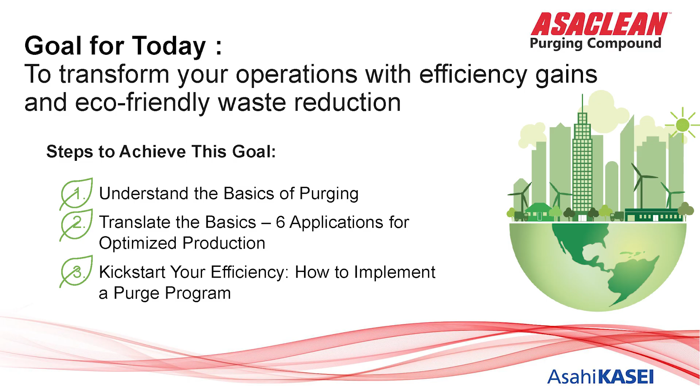We've been the worldwide leader in commercial purge compounds for several years, and we service customers in more than 70 countries. So what are our goals today? We're going to basically give you the basic understanding of purging, translate the basics into 6 applications for optimized production, and how to implement a purge program.

First, we'll start with the basics of purging. What are purge compounds? Purge compounds are designed to clean thermoplastic processing equipment. It could be injection molding, it could be extrusion and all facets of extrusion—pipe, profile, sheet, blown film, blow molding, every single type of plastic processing we help. Purge compounds contain a base resin and other additives to optimize and clean your screw barrel extruder downstream plumbing thoroughly and quickly, and they're used by processors across the industries to reduce downtime and scrap.

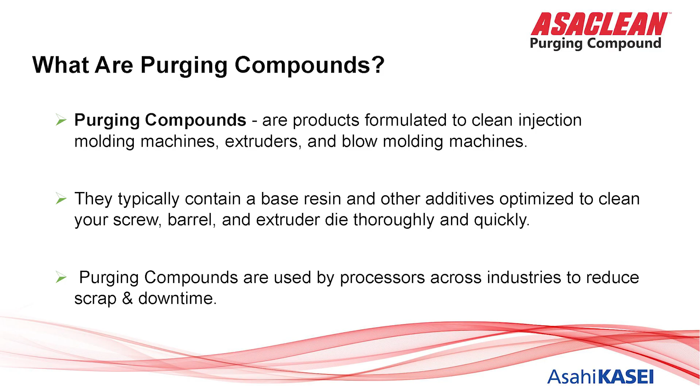Some of the variables that we need to determine for grade selection—because we do have 23 different grades of material—we're going to need to understand what your process is. If you're an injection, extrusion, or blow molder, the kinds of resins that you're processing, whether it's a commodity, engineering grade material, or a super engineering grade material such as PEEK, Ultem, LCPs, Ryton, and so forth. We're going to need to understand what we're actually trying to accomplish here.

Are we cleaning the die, the downstream equipment? Are we doing a screw pull? Everybody's situation is uniquely different. Even though they could be classified in the same arena, everybody's equipment is different, everybody's resins are different, everybody's processing is a little bit different. So we need to get a thorough understanding of where the problem lies, and then what we're going to determine is the type of purge compound necessary to get the job done.

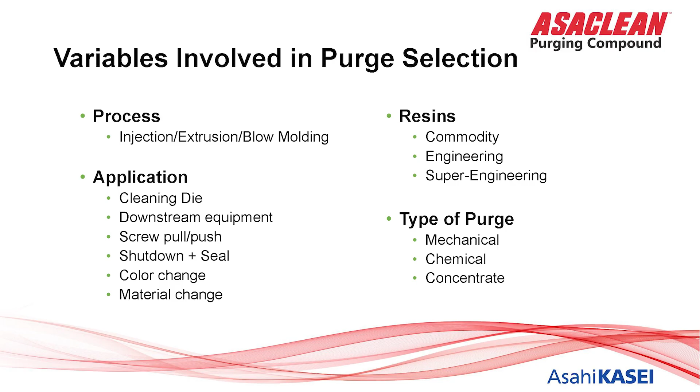Obviously, there are mechanical type purge compounds that you're familiar with, chemical type, and concentrate versions, which we'll get into a little bit later. We'll first talk about mechanical purge compounds. Mechanical purge compounds have been around a very, very long time. Those were primarily the first types of purge compounds that people used when purge compounds came into play. The neat thing about mechanical purge compounds is, again, they're simple to use.

Typically 2 to 3 system capacities of a mechanical purge compound are required to clean your equipment. For example, in an injection molder, if the screw and barrel holds 1 pound—and that might be high for some machines, but we're just going to use that as a round number—it's going to typically take 2 to 3 pounds of a mechanical purge compound to get the job done. They require no soak time. The object is to move the mechanical purge compound through the screw and barrel of the machine with the screw forward, as fast as you can. So as far as purge time, they're very, very short in duration.

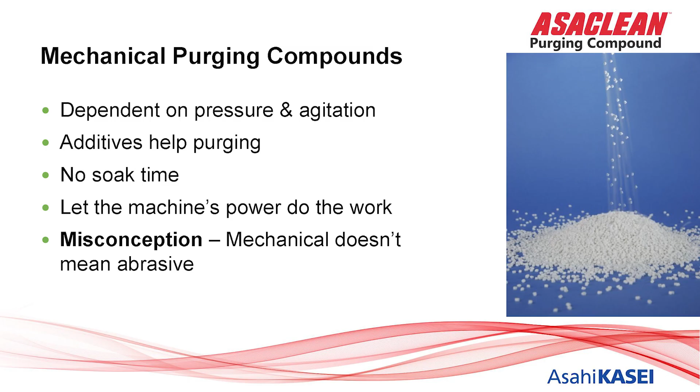Chemical purge compounds, little different animal. The reason why I really like chemical purge compounds, especially in extrusion applications, is because there's a lot going on chemically. Chemical purge compounds do expand. In addition to that, we create steam with the use of a hydrate, and the material will foam. The formulation also contains some mild detergents and mild abrasives, which help you get the job done very effectively.

With chemical type purge compounds, the object is different from that of a mechanical purge compound. Once the system is completely full, rather than run it very quickly, you're going to run it very slowly to get the chemical reaction to do what it needs to do. Once the material expands and the chemical reactions take place, that really forces the purge compound into negative flow areas and dead spots very effectively.

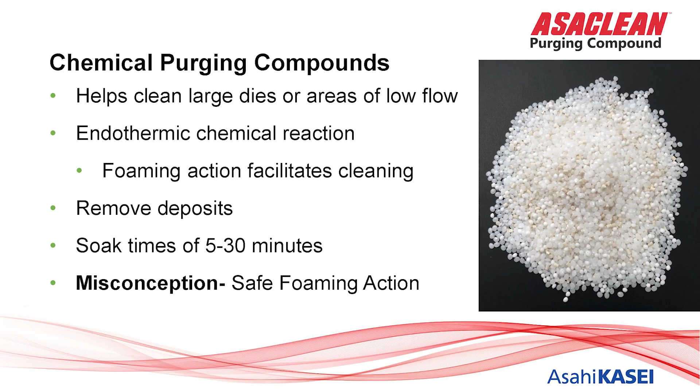So even when you're talking about systems that are extremely complicated, whether they have a static mixer, a melt pump, complicated dies such as in a blown film environment, this material will really get into those areas and clean the material and clean the system effectively.

Purging concentrates - we recently resurrected this product because the need had become so great. Basically, what we're doing with a concentrate is taking all the active ingredients that we have in our chemical purge compounds and separating that from a carrier resin. The reason why we do that - let's say in the case of a blow molder who primarily manufactures high density polyethylene - if the carrier resin in our ready mix product is a high density polyethylene, you certainly don't need to be buying polyethylene from us.

You're buying it by the rail car. So if you were to buy our concentrate and mix that with your production material, it's going to save you much more - it's going to save you money, number one. And the cool thing about a concentrate is that you can play with the mix ratio depending on the severity of the problem that you have.

We have found that a 20% mix ratio of our concentrate to 80% of your production material will typically get the job done in most cases. Conversely, if it's a really bad situation - let's say if you're dealing with a color change going from a highly loaded carbon black to a white to a clear - you have the opportunity to ramp that up to maybe 30 or 40% to get even increased cleaning capability out of the product.

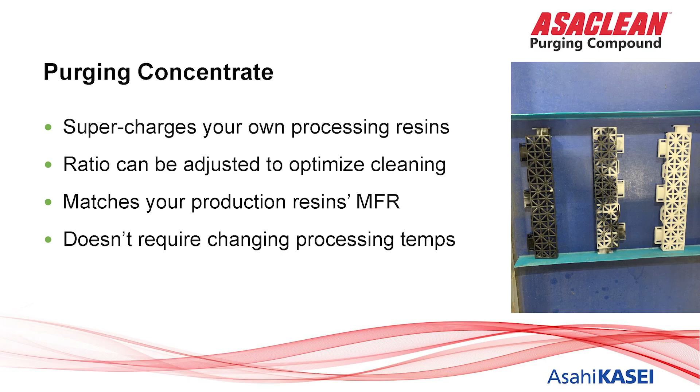On the other side of the coin, if it's not that difficult and you need to use it as a shutdown purge, you can drop that mix ratio from 20 down to 15 or 10% and still get the job done effectively. So you control the mix ratio, you control the purging power of the formulation that you're going to develop.

Typical problems that injection molders face - and if you are an injection molder, you probably already know this - we need to really clean the screw and barrel, the nozzle, the check ring. Our purge compounds, whether mechanical or chemical in nature, will clean the hot runners or hot manifolds.

When it comes to a chemical type purge compound, you can typically use them at the operating temperature of whatever resin you're processing. And if your tool gives you problems, such as a hot runner or hot manifold, we would increase the heat slightly there to increase the purging power or cleaning capability of the material. By the way, injection molders, the majority of all our purge compounds are moldable.

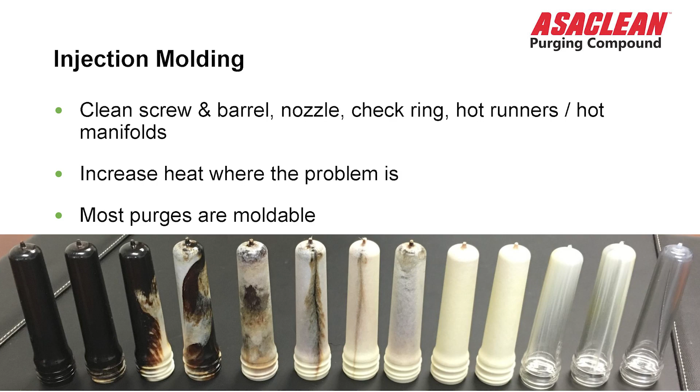Extrusion, as I mentioned earlier - chemical purges work extremely well in extrusion applications. Why? Again, because they expand in low pressure environments, and work well in twin screw applications. And if you do have vented barrels, it'll clean the areas close to the ports and the vent.

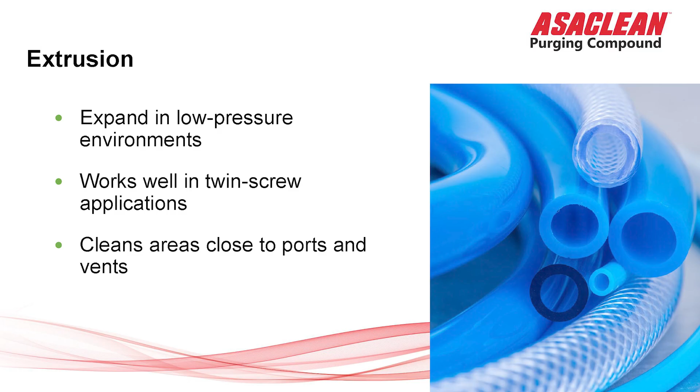One thing that we really need to stress is following the directions. Believe it or not, I can't tell you how many times I'm in plants where customers have utilized our products over the years, and because of personnel changes or what have you, we would start out a certain way, maintaining the procedures to give you the best performance out of the product. And over periods of time, we see that those procedures start to slip, or we see that people try to do things their own way. Guys, it's only shooting yourself in the foot.

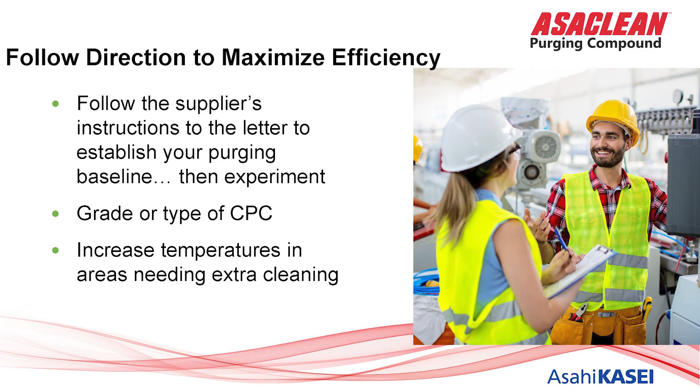Once we develop a standard of performance, it's basically because you're using the product as directed or by the instructions that we provide you. Now, the procedures we provide are for the majority of situations. A lot of times what we do initially when we help you refine a purge process is tweak those procedures. Sometimes we might need to add a couple extra steps based on your present situation, or we could minimize those procedures. But the bottom line is, once we have them nailed down and able to generate the best results with our purge procedures, please stick with them.

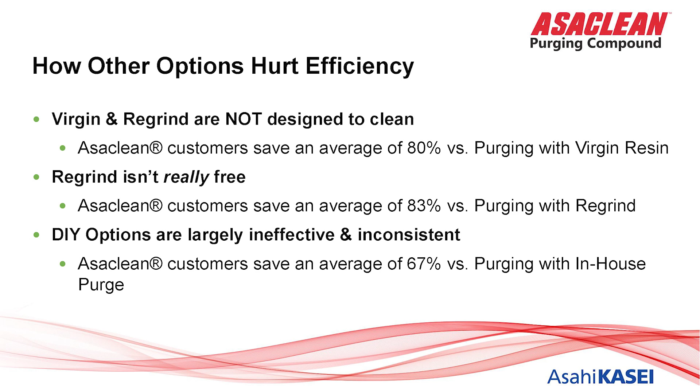Other things that could hurt your efficiency: a lot of folks we come in contact with, before they come on board with us, will be using virgin or regrind material to purge with. Now, yeah, it can be relatively effective, but you have to keep in mind that virgin and regrind are not designed to clean. You're going to go through an awful lot of it. And even though it might be considered scrap, it's really not scrap. On average, we save 80% on purging with our materials versus using virgin or regrind.

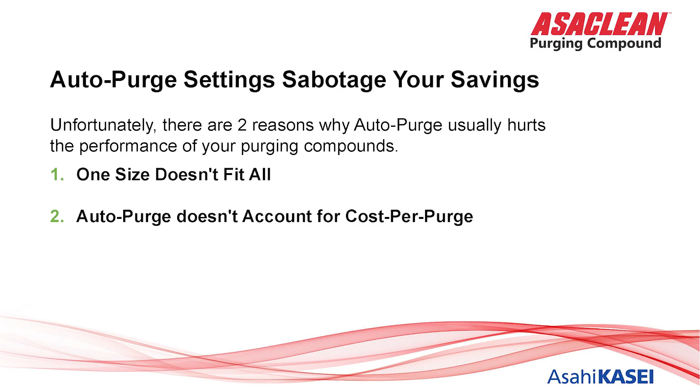Auto purge settings - whether it's injection molding or extrusion, there's always typically an auto purge setting. Those also are not the best way to go. Our procedures are designed to be followed, and the machines aren't capable of doing that a lot of the time. One size does not fit all. Also, auto purge does not account for cost per purge.

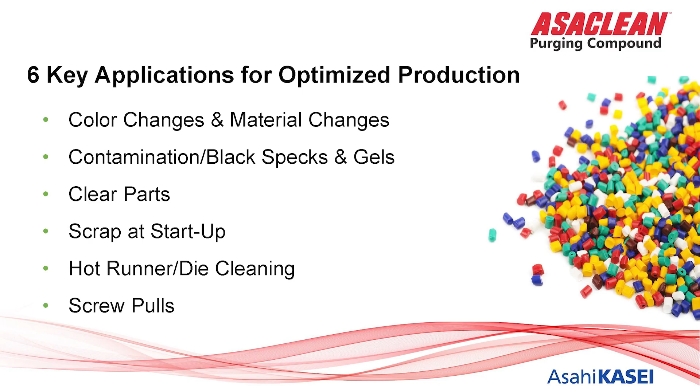We're now going to get into 6 applications that we typically have to deal with. If you don't know it already, these are the top 6: color changes and material changes, contamination or black specks or gels, what happens when you're running clear parts, scrap on startup after a shutdown, hot runner die cleaning, and screw pulls.

Just a little purging 101. As everybody knows, material inside your plastic processing equipment is always going to take the path of least resistance. So what typically happens over periods of time - let's use a simple analogy - if you're running polyethylene and doing multiple color changes, you're going to develop layers internally within the system, on the walls of the barrel, the screw, flights, etc. We see this all the time.

I might go into a plant to help with a black to white or black to clear color change. And once we put the purge compound in, not only do we get the black out, but we might see colors that hadn't been run in months. There's been several occasions where I've seen a yellow or a green or another color come out that they hadn't run in a very, very long time.

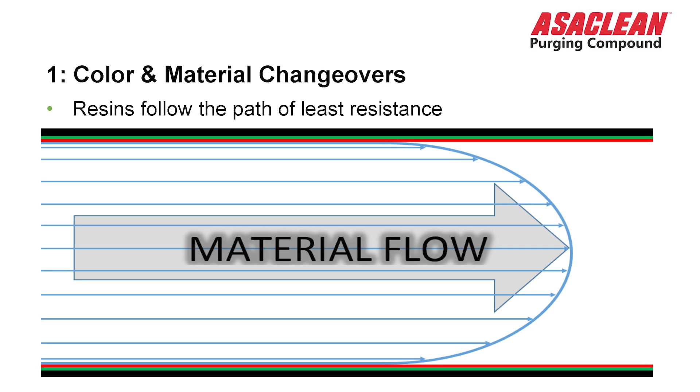Again, accumulation of layers will develop on the flights, barrel wall, check ring, and nozzle of an injection molding machine. Same thing happens whether it's extrusion, blow molding, or any type of extrusion application. There's always hang-up areas that present the biggest challenges.

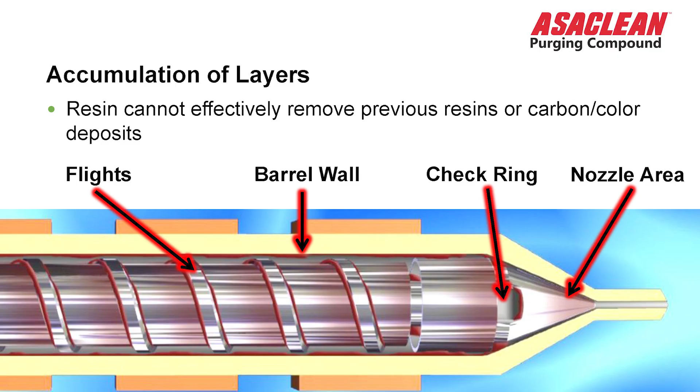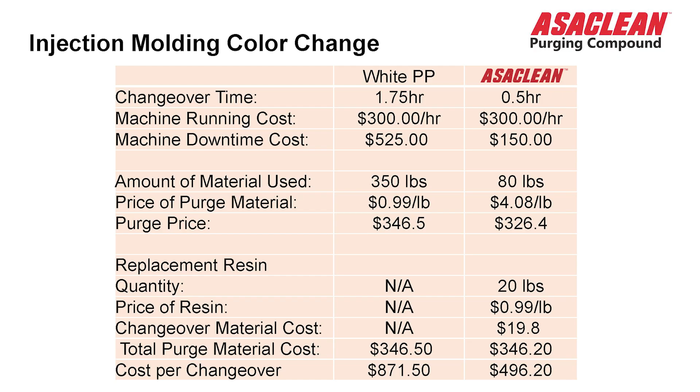We used 350 pounds of material versus 80 pounds of Asaclean. If you take a look at just the bottom line on the cost per changeover, we reduced it from $871 to $496. And after amortizing that out, the cost savings add up dramatically. If we're doing 5 changeovers per week, 48 weeks per year, annual savings is $90,000, or 43%.

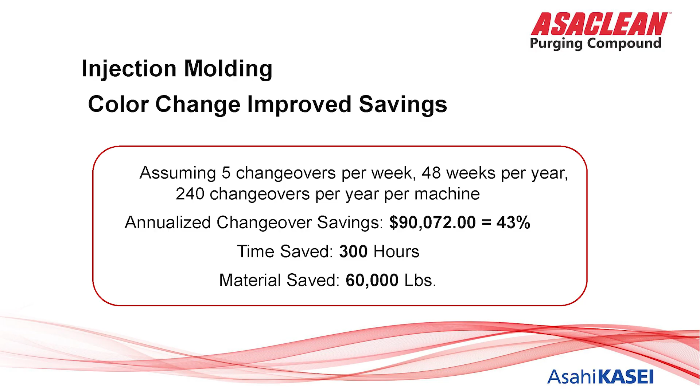And we were able to give them back 300 hours of valuable productivity. So you can see where purge compounds can have a huge effect on your bottom line.

Second thing, black specks or gels. These pictures depict what happens if you were to leave ABS in your system at 460 degrees for a period of time. You can see after 1 hour, the ABS begins to degrade pretty well. After 5 hours, it's pretty well gone.

In the bottom picture, after the heaters are turned on and purged with the next resin—in this particular case, polystyrene—you can see that the polystyrene has coated the degradation but hasn't really removed it. And over a period of time, that's going to continue to build up and create black specks.

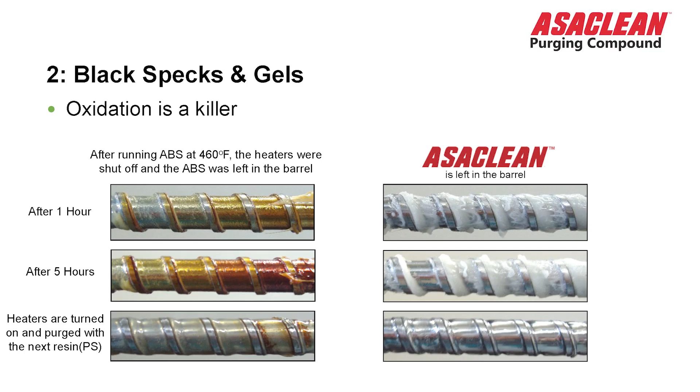On the right side, where you use the Asaclean left in the barrel, the top photo will show you that the ABS is completely gone. After 5 hours, obviously there's nothing happening whatsoever. In the last frame on the bottom, you'll see that once the Asaclean is displaced with, in this case, polystyrene, the screw is like it came out of the box, free of contamination.

Clear parts. Clear needs to be clear, guys. Any types of specking or streaking just cause rejects.

When we're talking about clear parts, this is one application where the concentrate version that we have really comes into play. Whether you're molding an acrylic, a polycarbonate, a styrenic, or any kind of clear material, you can mix our concentrate with your production material to maintain the machine and keep it free from black specks, using it on a shutdown or during your processing.

If black specks do appear, you can use the concentrate to remove it. Most purge compounds are either styrenic or polyethylene based, and if they have a polyethylene or styrenic carrier resin, they don't necessarily go well with clear products. You could remove contamination, but then the issue becomes removing the purge compound out after the purge process, so you do get back to a clear part.

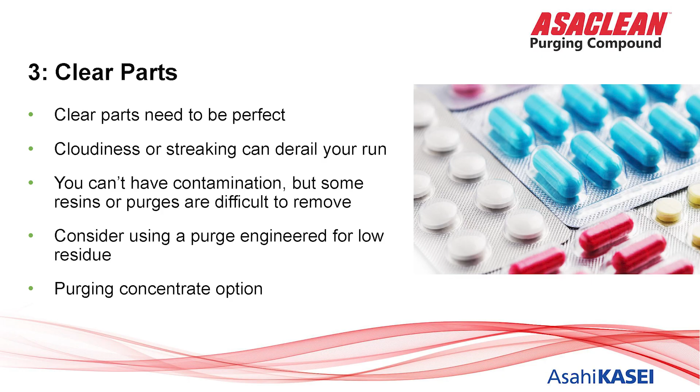If you were to leave ABS in the system, let's say on a shutdown, and go to cold steel, well obviously that steel is not going to drop down to ambient temperature immediately—it's going to take a period of time. Within 60 minutes, and we all know it's going to take longer than that to go to cold steel, you can see what happened.

So getting your production material out of your system effectively as quickly as possible on shutdown, before you go to cold steel, is extremely important. That's where purge compounds come into play.

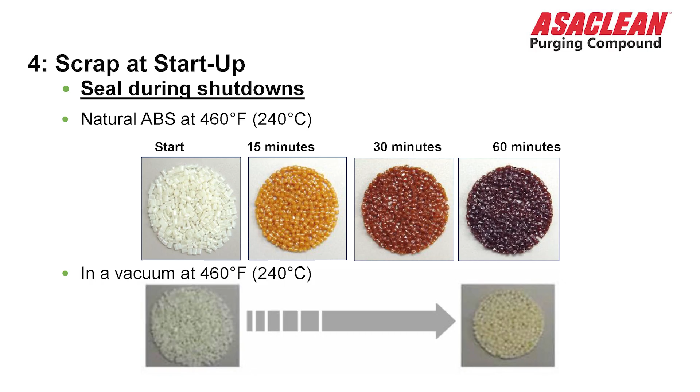Hot runner and die cleaning. Whether you have multiple drops, just a few drops in a hot runner environment, or high cavitation molds, getting the material out of the system effectively or performing a color change is extremely important. We have grades that will handle gate sizes down to 20 thousandths. So if you are having problems with hot runner tools with high cavitation, we'll have a purge compound formulation to handle that.

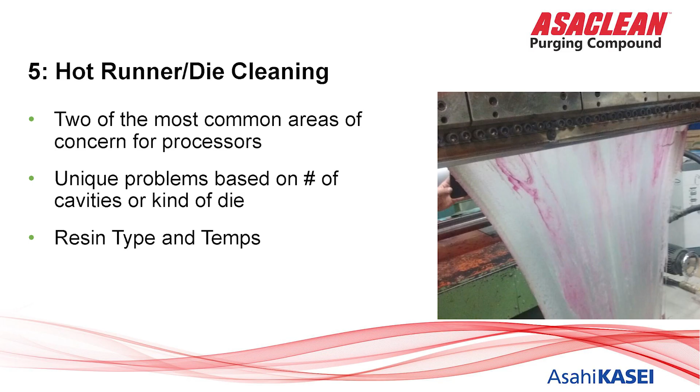When it comes to extrusion, die cleaning, or head cleaning, again the chemical purge compounds are much more effective in that application. They foam, they expand, and they get into the negative flow areas and dead spots very, very effectively.

When it comes to chemical type purge compounds, in some cases we're going to ask you to heat the machine in certain areas. We typically ask you to heat or apply additional heat in areas after the screen pack, melt tube, static mixer, melt pump, and of course the die. And we do this for a couple of reasons.

Chemical purge compounds are heat activated. They typically begin the chemical activity around 360 to 380 degrees. But for every 30 degrees you add, the chemical activity almost doubles. At 550 degrees, you're getting the most chemical activity out of the product that it can generate. And it's also time released.

So let's say we are purging an extrusion system. Typically in extrusion, we're not seeing a lot of problems in the extruders themselves. They're always downstream in melt pump, static mixers, die, feed block. Those are the areas where we're going to increase heats. So in the extruders, we would keep those at operating temperatures, increase heats where we need to, because we don't really want to set the purge compound off to its maximum capability in the extruders where you don't need it. We want it to happen downstream. So that aids in the cleaning process extensively.

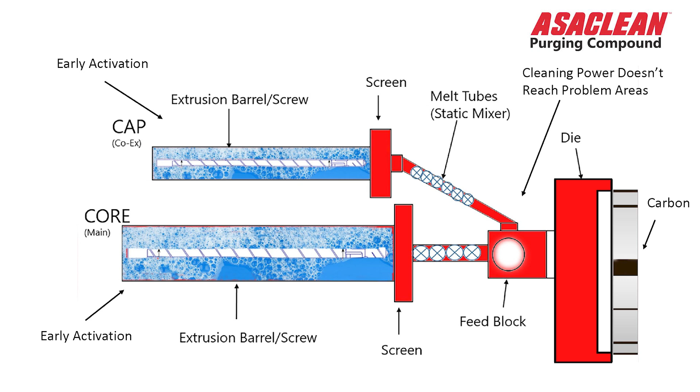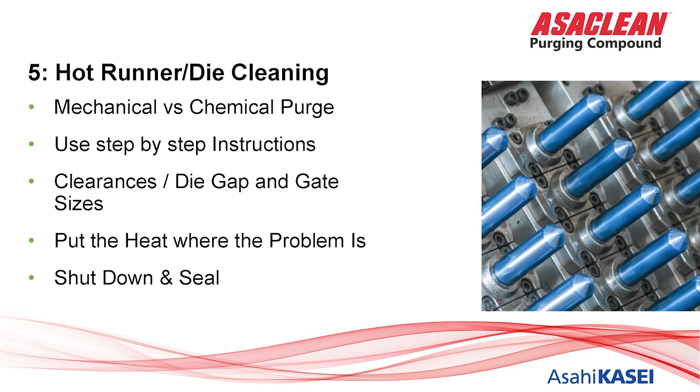Again, when we're talking about hot runner and die cleaning, there are considerations that we need to make sure of. Number one, we're going to determine if the best solution is a mechanical or a chemical type purge. We're going to make sure that we use the step-by-step instructions. We're going to understand what the clearances, die gap, and gate sizes are. We're going to put the heat where the problem is, and we're also going to deal with shutdown and sealing.

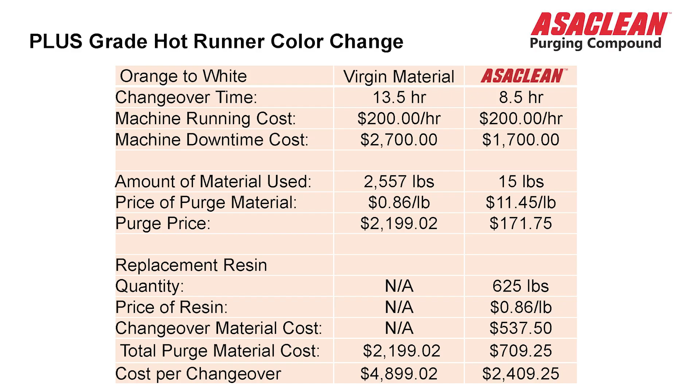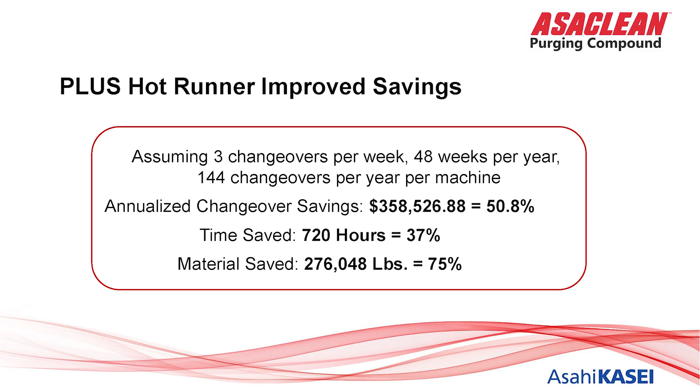And the bottom line cost associated with using the purge compound was $2,409 using 15 pounds of purge. Again, amortizing that out, 3 changeovers per week times 48 weeks per year, overall savings in that particular case was 50.8%, or over $358,000. Time saved, 720 hours of valuable productivity we were able to give back to this client. Material saved, 75%. Pretty impressive numbers.

Screw pulls. Guys, anybody pulling a screw, you have to pay close attention to this. We have a product that's called Asaclean EX. I don't say this cavalierly, it's the best product on the market for that. Not only because I represent the product, but I actually had to compete against it when I was with my former company. And there's nothing that touches this product for a few reasons. Number one, it's extremely easy to use. It's very, very cost effective.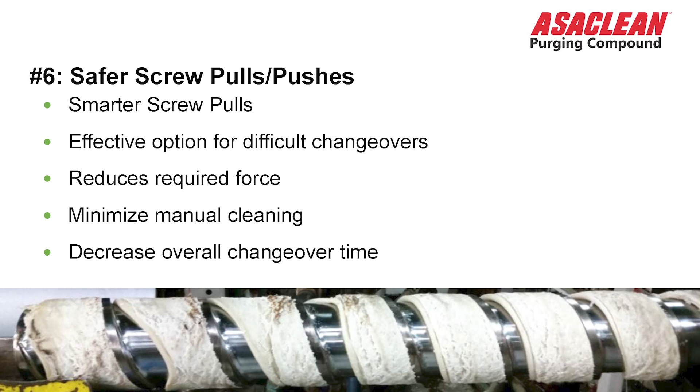Now, you're going to notice first and foremost that this is a small tabletop extruder, screw and barrel. Guys, I've put this in extrusion situations where the screw was 6 inches in diameter and 24 feet long, and it works exactly the same way. As you can see, without a purge compound, removing a screw, even of this size, is pretty hard, pretty difficult to pull out. You can see how in this particular case, the ABS is really in between the flights of the root of the screw. Pretty sticky.

After running the Asaclean EX through the system, you're going to notice a couple of big differences. Number one, the screw is going to be much, much easier to pull out of the machine. Very, very little effort, and whatever the size of the screw doesn't really make that much of a difference. Here's the fun part: the purge compound will peel off the flight in the root of the screw just like a banana, taking everything with it.

So guys, there's no reason to have to use a wire wheel or a wire brush and have to spend hours manually cleaning the machine. Let me point out, it's not necessary to always have to pull the screw. What happens in a lot of cases is once our clients or customers develop enough confidence in the product after pulling it once or twice, they know that it's going to be clean. So they'll just simply follow the Asaclean EX with their next production material to displace the Asaclean EX.

Very cool product, time saving. It is glass filled and really, really gets the job done effectively.

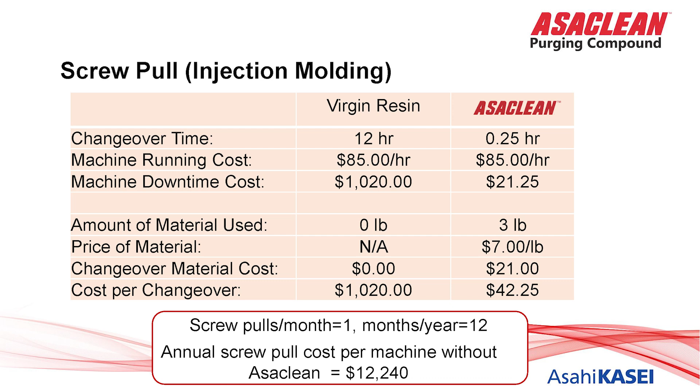Here's another case study on a screw pull. Just take a look at the changeover time, guys. 12 hours in this particular case to manually pull and clean that screw, at $85 an hour. Machine downtime cost is over $1,000. Using Asaclean EX, less than 30 minutes, downtime cost $21.25. We used 3 pounds of material in this case. Our cost using purge compound was $42.25 versus their cost of 12-hour manual teardown and clean. Savings was astronomical, not to mention giving them back valuable productivity and production time.

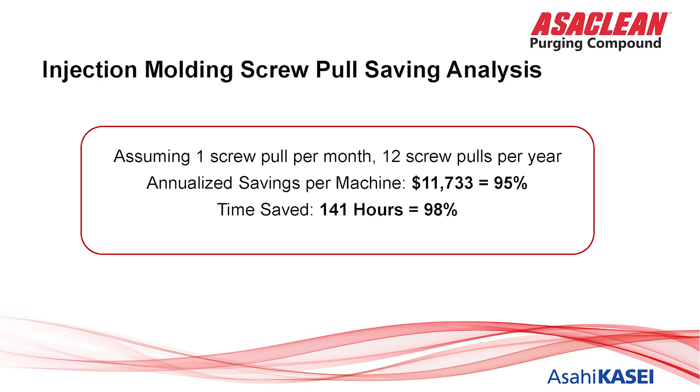Again, 95% annual savings. Total time saved: 141 hours. Remarkable.

Okay, so having given you a little bit of background on what we do and how we do things, I'm going to take it a step further and explain the steps on how we implement a purge program. This is what to expect, guys.

We're going to have an introduction, get to know each other on what you do and how you do things. We're going to diagnose your situation. We're going to provide you some no-cost material to test.

We're going to determine when we can test the product, and we do this a couple of different ways. Either we'll ask if it would be okay for us to come to your plant and technically support the material in person, or if that's not feasible, what we normally do is schedule a Teams call to review best practices with whoever's going to be putting the product in the machine, to give you the best chance for success. We're going to do a side-by-side cost analysis, which I'm going to get into shortly.

And then after we develop a baseline of performance with the use of our purge compound, we just don't drop the ball and let you go on your own. We like to maintain contact with you guys to make sure performance levels are maintained and that the product is constantly meeting your expectations.

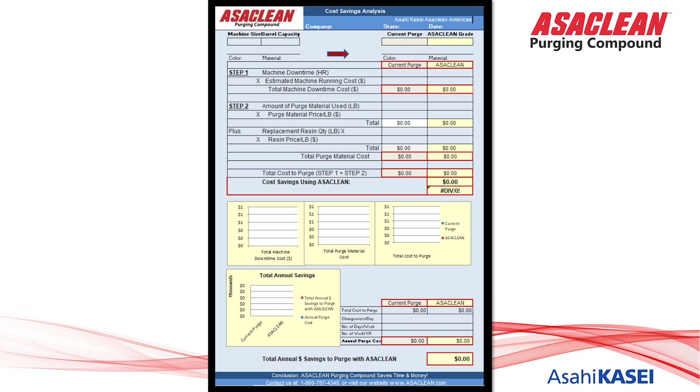Let's face it, guys, purge compounds do cost money, so somebody's going to want to look at the numbers—what did the purge compound generate in savings? This is a very quick and easy way, a one-sheet form that will enable you to provide that to your production manager, purchasing person, or whomever, to show exactly what the purge compound was able to generate.

How to use purge compounds correctly. Again, we're going to understand all purge compounds are different and have different instructions in different situations. Different purge compounds are best at different things, so that's where we determine a mechanical, chemical, or concentrate type purge.

And then working with us, we're going to understand what the baseline is before we start using Asaclean, and then after we use the Asaclean, develop your purge program.

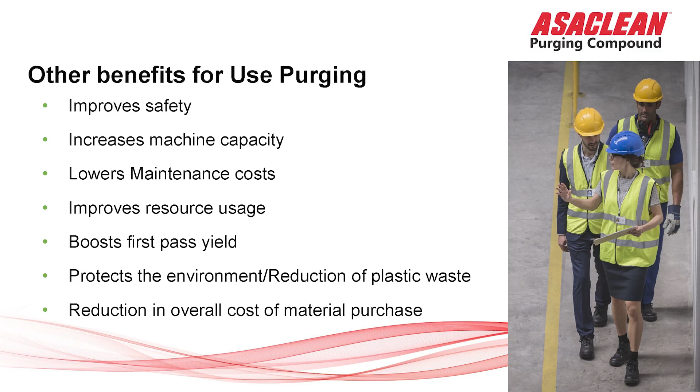Other benefits for using purge compounds: they improve safety, they increase your machine capacity, reduce maintenance cost, improve resource usage, boost your first pass yield, protect the environment with reduction of plastic waste, and reduce overall cost of material.

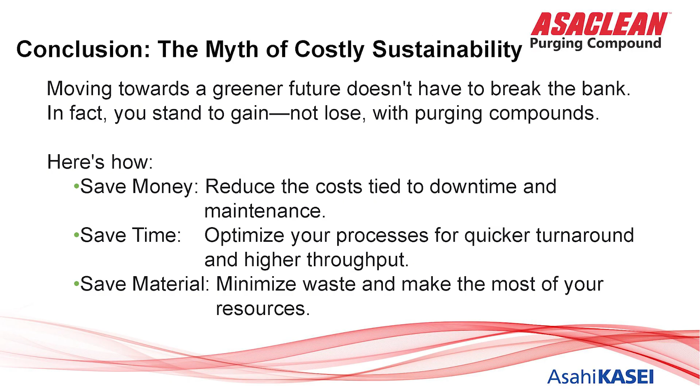The myth of costly sustainability. Moving towards a greener future doesn't have to break the bank. In fact, you stand to gain, not lose, with purge compounds. We're saving money by reducing the cost tied to downtime and maintenance. We optimize your performance for quicker turnaround and higher throughput, and minimize waste and make the most of your resources.

That's it, guys. This would normally be the time where I would ask for any questions or comments. Typically in one of these one hour sessions, hands go up frequently, and there are a few questions that we normally get.

Derek, if you'd be kind enough to mention some of those questions, I'll be happy to answer them. Absolutely, Chris. The first question we have here is, what was the name of the grade in that screw pull video? The name of the grade is Asaclean EX, E like Edward, X like X-ray.

Are purging compounds safe for hot runners? Yes, they are. One reason is if you were to use a chemical type purge compound, chemical purge compounds only emit carbon dioxide and water vapor in their chemical reaction, so there's no odors or fumes that are offensive or harmful in any way. Chemical purge compounds' particle size is submicron in its melted state, so whatever the gate size is, chemical purge compounds don't have an issue. Mechanical purge compounds, same way. All of our purge compounds are recognized as safe by the FDA.